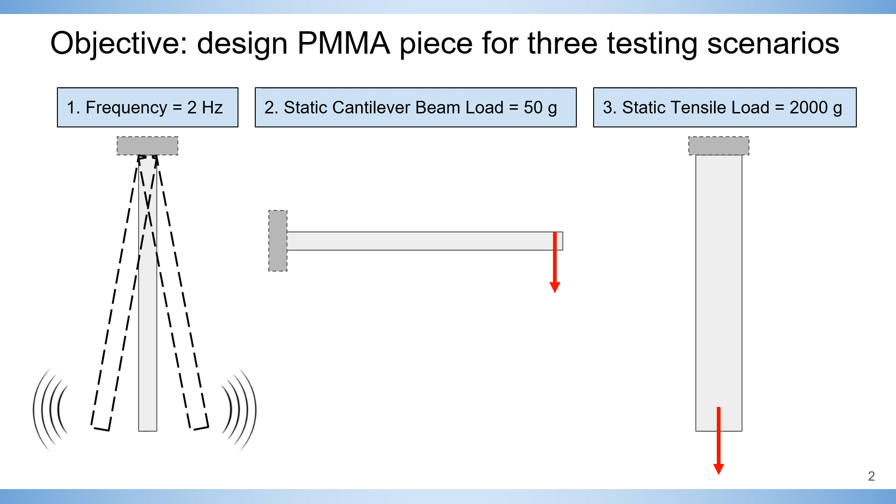The dimensional limitations and material properties for this design project are as follows. First, our design is bounded by a 150 by 150 millimeter square piece of PMMA acrylic cast sheet. The thickness of this sheet is 2.54 millimeters. Our design must be at least 100 millimeters in length and have areas for the pads of the clamps to sit on with a diameter of greater than or equal to 16 millimeters. Additionally, there must be a hole for the weights to hang through of equal to 6 millimeters.

The properties of PMMA are as follows. The Young's modulus is 2.798 gigapascals. Poisson's ratio is 0.37, the tensile yield strength is 60.65 megapascals, and the density is 1.19 grams per centimeters cubed. The diagram of the cast sheet we'll be cutting from is seen in the center. It has side lengths of 150 millimeters, and the diagonal is 212 millimeters, which is important to note for the discussion of my dimensions and my final design later in this presentation.

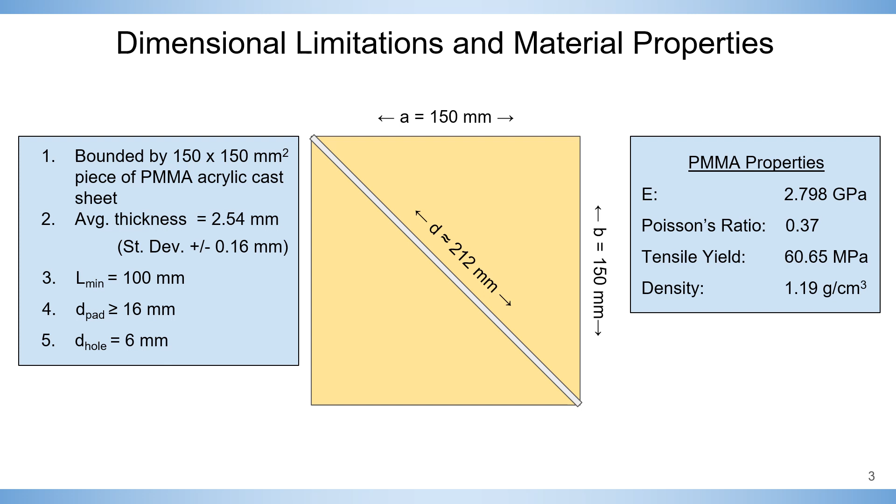Discussing my dimensions, I want to talk about how I optimized my design via structural mechanic equations and trial and error. On the left side of this page, you can see equations for deflection, bending stress, tensile stress, the second moment of inertia, and the factor of safety. I plugged these equations into Excel, adjusted the width and length parameters, and was able to optimize my actual design geometry based on data that I gathered from ANSYS. I decided to use a dog bone, and while it's possible to use other geometries, I really wanted to figure out how the width and the length actually affect the frequency of my design.

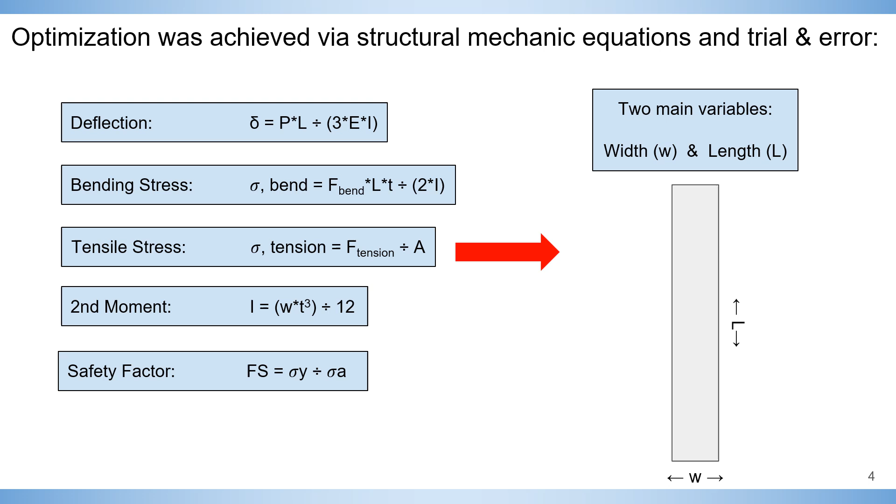I was able to determine an equation for frequency based on the beam geometry or dog bone geometry, and this was determined via linear regression. I adjusted the width and length of my dog bone design, plugged it into ANSYS, and analyzed the frequency of the object, plugged these data points into this graph, and was finally able to compare the length and the width of the different designs. As you can see, the only 2 designs that were able to achieve a frequency of 2 Hz were the 190 millimeter length dog bone and the 160 millimeter length dog bone. The 190 is marked in the red lines.

However, if you go towards the deflection versus width graph on the right, you can see that with a width of 6 millimeters and a length of 190 millimeters, this design would experience a deflection of 5 centimeters. On the other hand, the 160 millimeter length and 2.5 millimeter width would experience a deflection of 7.5 centimeters. Overall, I learned that by maximizing the length, I would minimize frequency but increase deflection, while on the other hand, maximizing width would minimize the deflection but increase frequency.

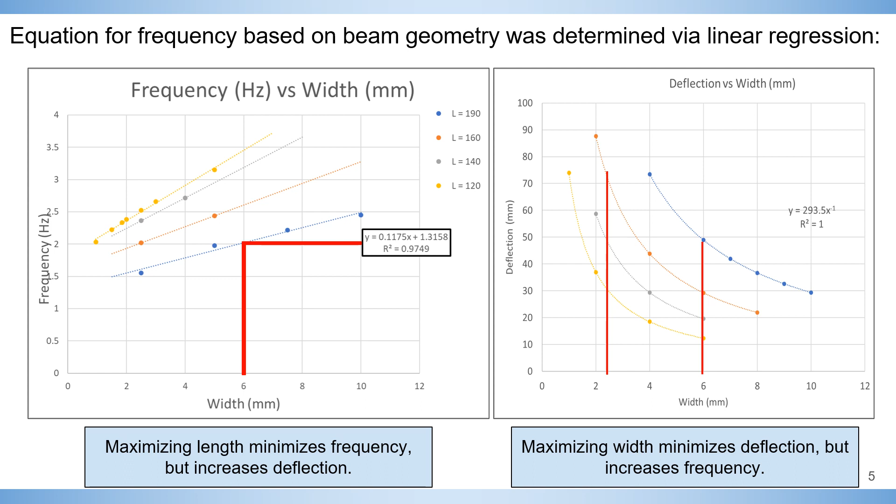These are the dimensions of my final design. As I discussed previously, I decided to go with the 6 millimeter width and the 190 millimeter beam length, which is the length from the center of the clamp to the center of the applied force. The total length of this design is 210 millimeters, which is less than the diagonal of the acrylic sheet that we're given to cut from. Additionally, the pad areas have a diameter of 20 millimeters, and the radii of this dog bone are 30 millimeters. Finally, the hole is 6.5 millimeters with an extra half millimeter added to ensure that the weight can fit through.

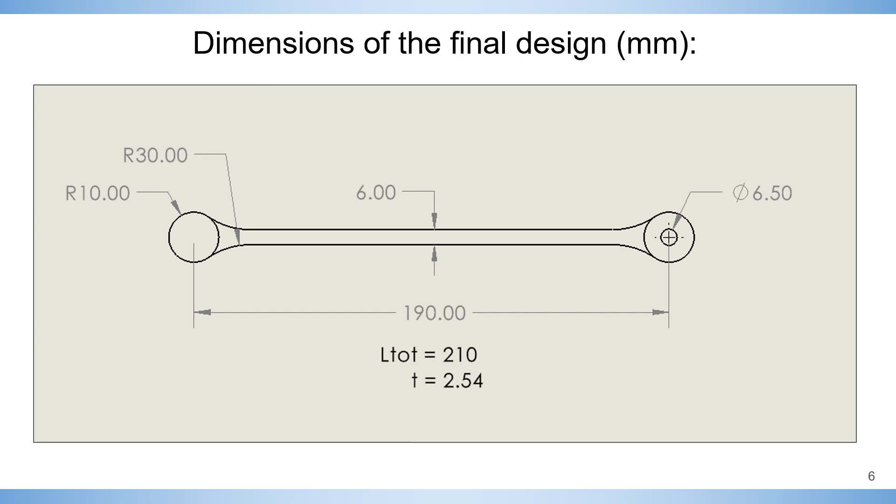On to analysis. Modal analysis predicted that the mode 1 natural frequency would be 2.08 Hz, which is really close to our expected frequency of 2 Hz from our Excel analysis. The setup on the left shows that we have one fixed end shown in purple, we have gravity applied as a body force, and we have the distributed mass applied at the bottom face in red, which is the weight of the phone and the clamp as described by the project requirements. The total range of frequencies in different modes is shown in the table on the right.

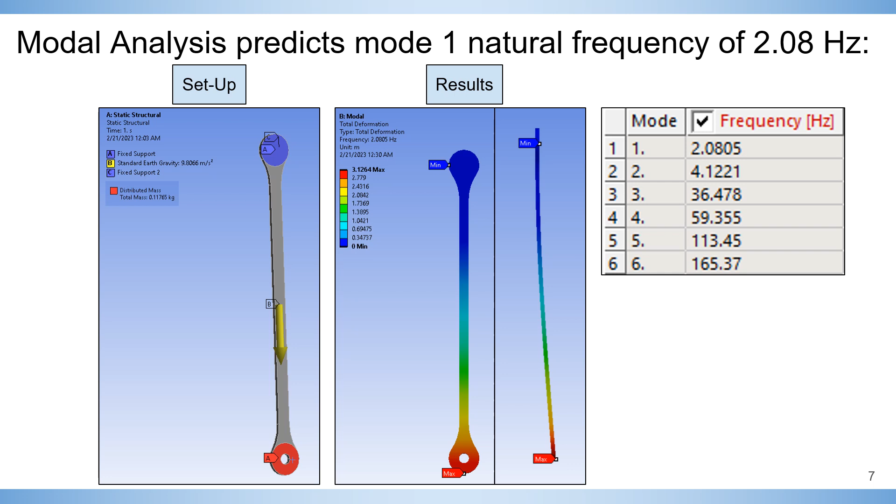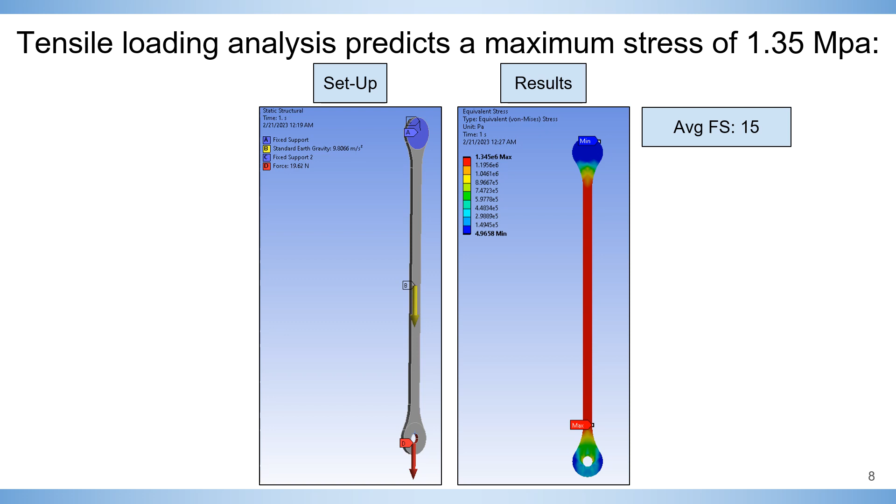The tensile loading analysis predicted a maximum stress of 1.35 megapascals and an average factor of safety of 15. The setup is shown on the left, with the fixed support shown in purple, and we have the body force applied via gravity, and finally the 2,000 gram weight hanging from the hole shown in red, which is about 20 newtons.